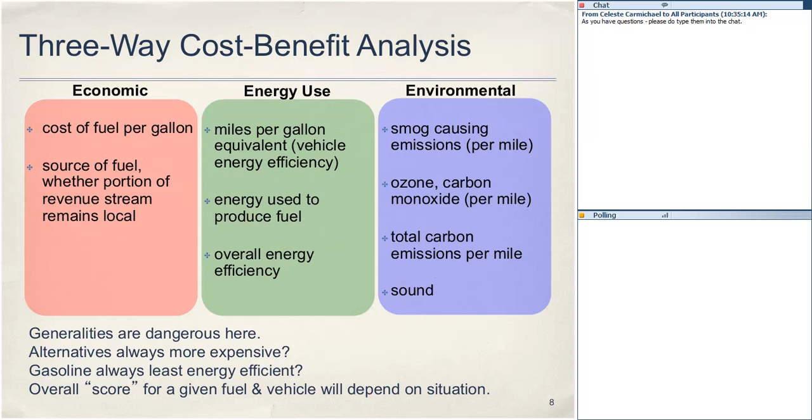I'll go through the next couple, Guillermo, and then you can add anything you want. Paul Mutolo talks about this well-to-wheels analysis. If you are working with anyone in your communities who, from a municipality level, wants to explore transportation issues, I would contact Paul Mutolo. It might even be that you set up a conference call so that an educator and your local municipal leader are on the phone with Paul to walk through how you do a well-to-wheels analysis.

One of the things he is working on in Tompkins County specifically is to bring a hydrogen-powered bus to be part of the Tompkins County Area Transit's fleet of buses. This will be an innovation that I think will require some education. When people hear the word hydrogen-powered fuel, there might be some misconceptions that raise questions in people's minds that we need to provide further education around.

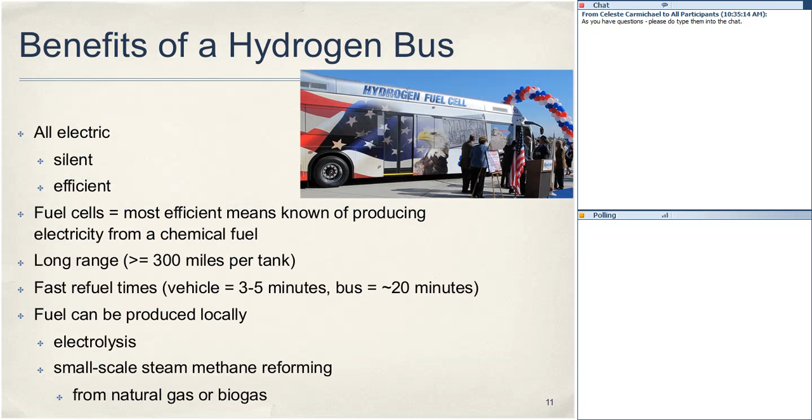So it's an exciting opportunity, and certainly it has benefits you can see listed here. I won't read through them, but it's also providing an opportunity for infrastructure for other vehicles that may come down the pike that will be hydrogen operated. So this innovation is leading to perhaps a broader adoption of this technology by other members of the community. Certainly Paul can talk about the technologies behind the hydrogen conversion.

I think this is the last slide before we go on to the next. So I'm going to see if Guillermo wants to—actually there's one more slide, but Guillermo, before we go on, is there anything you want to highlight about Paul's material?

Sure, thank you. Can you hear me okay? Hello? Hello? Hopefully you can hear me.

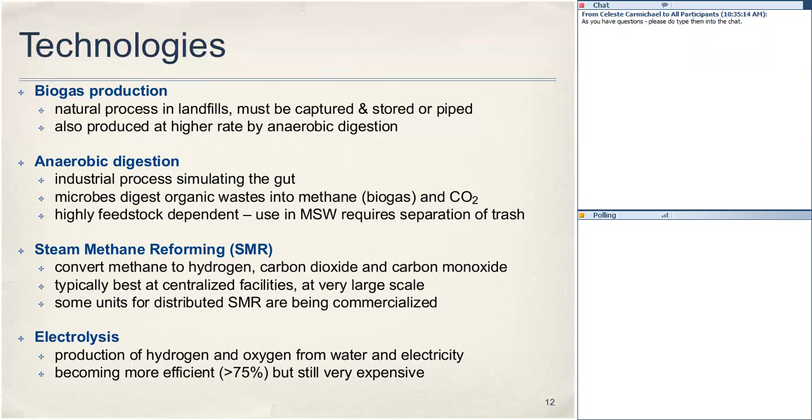What Paul really wanted to point out, as well as what the trucks, buses, and cars are running on, is where that fuel is coming from. I think that was one of the main points he wanted to get across, that these fuels can be produced locally. The hydrogen, the methane, natural gas can be produced from waste. So that was a major point to look at when considering the full system. Traditionally, a lot of what people have looked at is what we're going to run our fleet on, but not where that fuel is going to come from. There's a huge opportunity to use local resources like garbage, as was pointed out, for actual fuel production that these buses and cars can run on.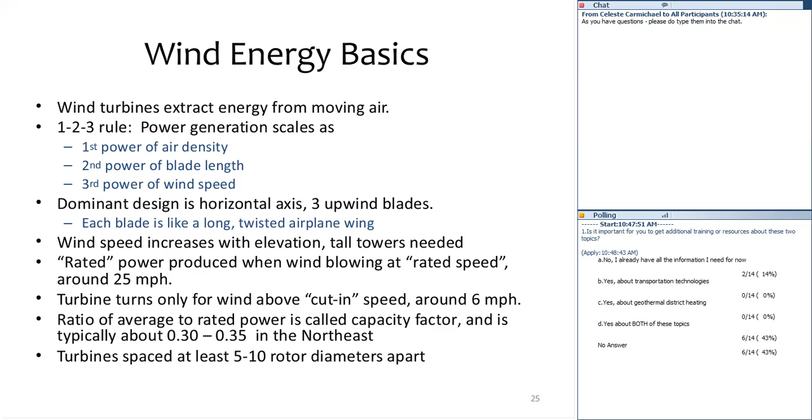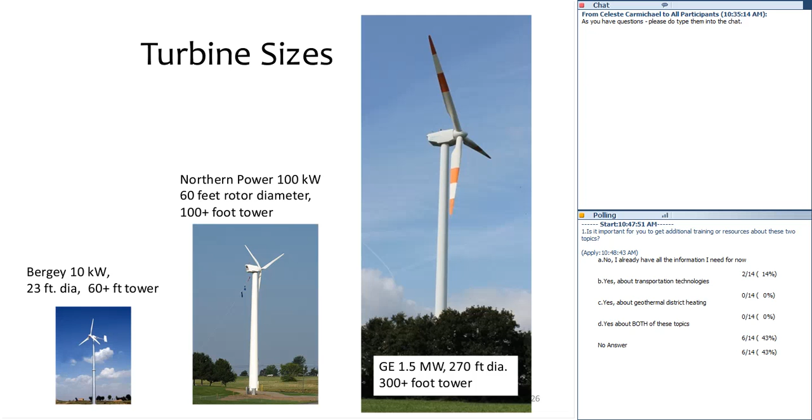On the next page I put a comparison of that GE scale turbine to a 747. These turbines are big, and they don't look so big because you often see them from afar. But up close, you see the real size scale. When you space them 10 diameters apart, you're talking about roughly 1,000-meter spacing between turbines.

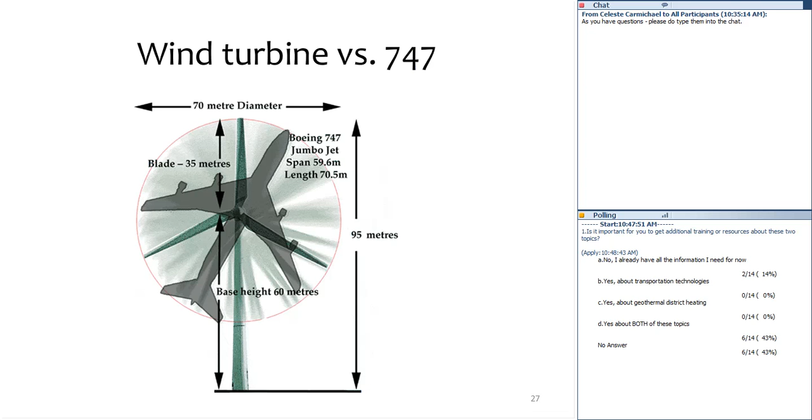Costs in the Northeast are a bit higher, though, because the capacity factor is lower and other expenses are higher. Nonetheless, there's a lot of activity in large-scale wind energy, even by people also generating electricity from coal, natural gas, and other means, because they want hedges against the variability of electricity from gas and other sources.

So in the state, I'll talk a little about that. The Renewable Portfolio Standard requires 30% of electricity to come from renewable energy resources next year. That includes wind, hydro, solar, and so forth. We already have quite a bit of hydropower in the state already.

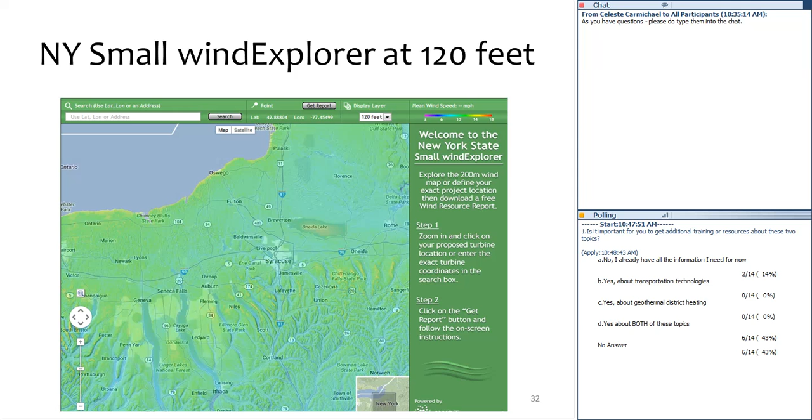A resource that I've found really useful when we've talked about wind energy is the New York State Small Wind Explorer. If anyone's coming to you asking whether it makes sense to have wind energy in your area, you can look at this Wind Explorer and zoom in on an area, and it'll give you average wind speeds. Average wind speed doesn't tell you everything, but if it isn't up over, say, 10 miles an hour or so, you're not really going to have a very good shot at economically producing wind energy. So that's a good resource.

And then, in the end here, I've listed a bunch of other resources: wind project listings, wind resource maps at the small scale and lower altitude, and higher scale for higher altitude industrial turbines. There's also all kinds of issues around review, siting, permitting, studies you've got to do, and financing. The NYSERDA Wind Energy Toolkit I found was very good—it steps you through how to do it and what's involved if you've got to deal with wind energy development.

Just so folks know, we did post this information sheet to the CARDI website. So if you go to the CARDI website and go to our community and energy section, you'll find this information flyer and all 4 presentations that were done at the Association of Towns conference.

Alan, I know you may not stay with us for the entire time, so let me just ask a question, because I know that in some places in the state, wind energy has been as controversial as natural gas hydrofracking. And in the public discourse there's a lot of what seems to be misconceptions about wind energy. Do you want to address what you've heard—worries about bats, flicker, and other concerns—what's out there in the general public's thinking about wind energy?

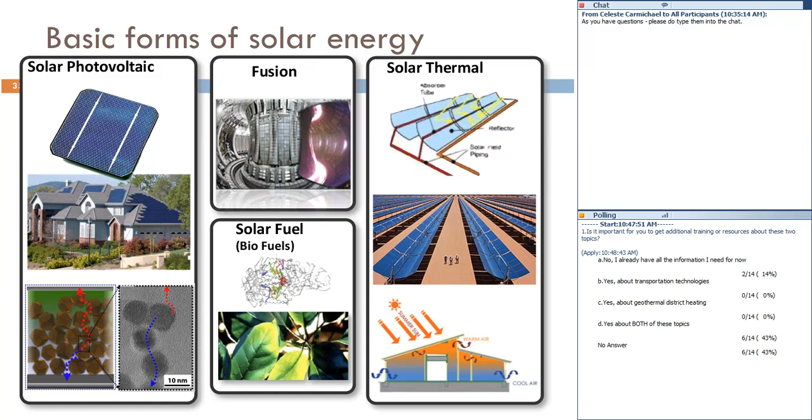And then solar thermal, which is the heating of water. You can also make electricity by heating that water to a level where you can turn a turbine with it. And you can also just heat domestic water, or domestic hot water, with the sun.

The availability—some folks really don't realize just the amount of solar energy hitting the Earth at any one time, but the amount of sunlight incident on the Earth in one hour is more than enough to supply the global energy demand for one whole year. The issue is that it's inherently intermittent, so there is nighttime everywhere, and it's also relatively dilute, so the amount of usable energy is significantly less than that.

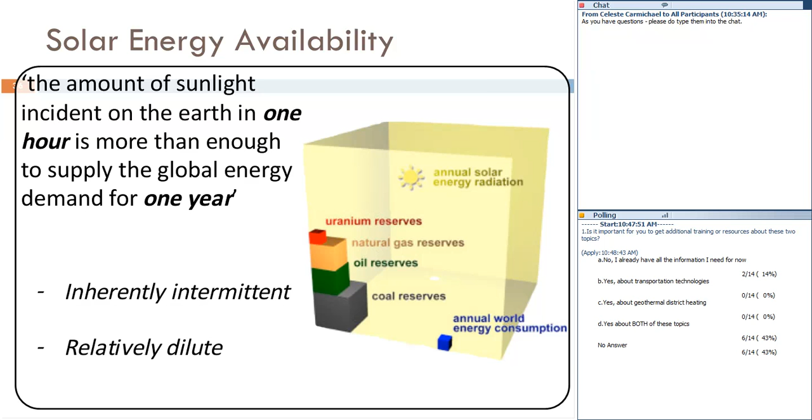I wanted to point you to a resource, PV Watts, developed by the National Renewable Energy Laboratory. If you Google PV Watts, it's a calculator. You can see circles in red showing the size of the system, the DC ratings you plug in, your expected system size, and the array type, whether fixed tilt or tracking. The program gives you other necessary components, like what angle to tilt your panels, and readings on your actual solar potential in your area. The conversion factor, the derate factor for Syracuse in this case, is 0.77, so 77% of the sun's energy is usable there.

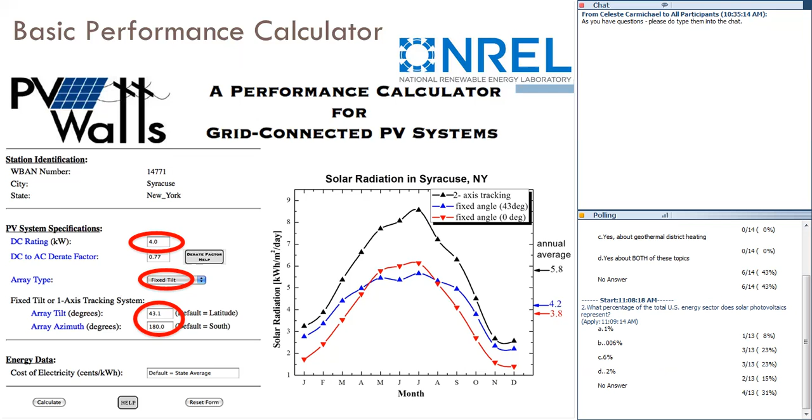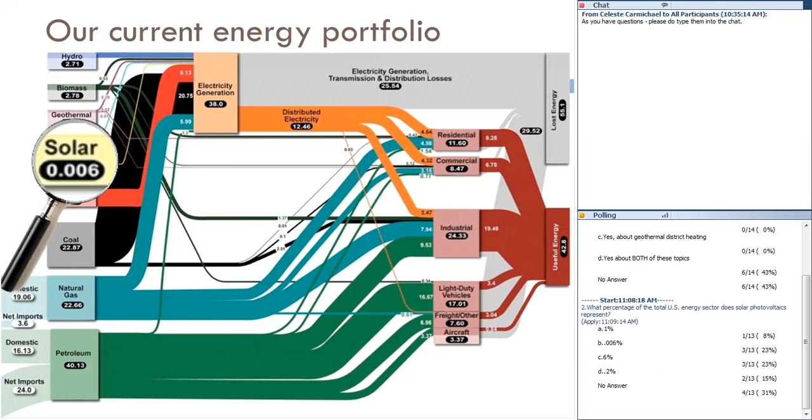Now we can see the actual amount of solar as a factor of the total U.S. energy sector is actually 0.006%. Quite a few people got that correct, 23% of you. That's good, but it's somewhat sad that such a tiny amount of our total energy is coming from PV at this point.

Basic motivations for adoption of renewable energy: we've traditionally been hammered with the fear of peak oil, CO2 emissions, and climate change. I think these are good driving factors sometimes for getting us to do the right thing, and certainly they are valid. We can get into more details of what peak oil and CO2 emissions are doing or what they mean, but certainly renewables are a way to alleviate our reliance on fossil fuels, which are the major contributors to climate change.

The other way to look at it is as an opportunity. There are a lot of opportunities in renewables, specifically in solar. Commercial deployment of solar PV since 2000 has seen quite an increase, an average of 65% annual compound growth over the past 5 years in the adoption and deployment of solar in the U.S. If you look at installation, we are increasing quite rapidly.

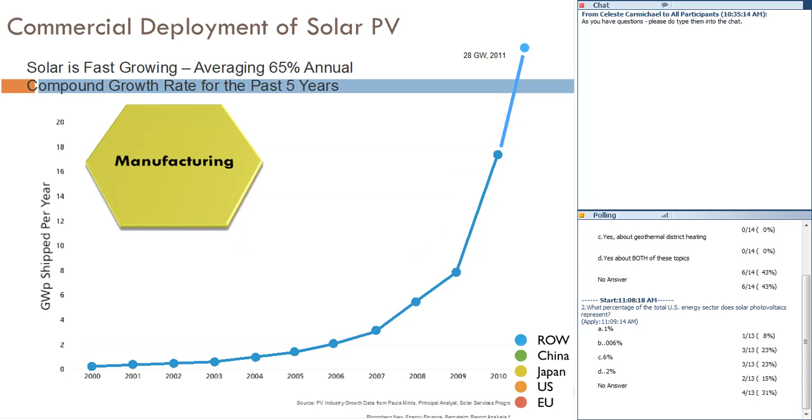The installed percentage: pink is the European Union, and the U.S. is about 10%, with China in green at 12%, Japan at 13%. Out of the total deployment, most of it is still in Europe, but the U.S. is catching up. For manufacturing, most is occurring in China at this point, but just 5 years ago it was a much smaller percent, with Japan leading. The U.S. has a small sliver there, but some companies are moving back to the U.S. in terms of manufacturing.

Let's do the other poll now. With most PV, most of the innovation occurs where? Most of it is made where? And proportionally, most of it's installed where?

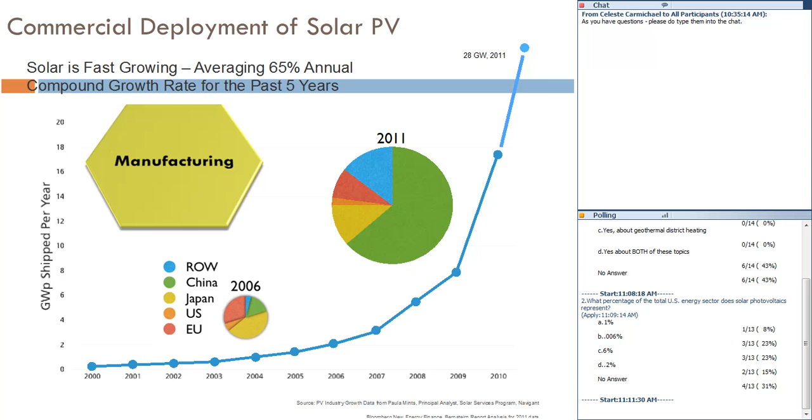This slide gives you the answer for where most of this is being made. The vast majority has been invented or innovated here in the United States, so most of the patents are coming out of the U.S. still, but it's being manufactured in China and deployed in Europe. Germany specifically has the highest deployment in the world. Many of you got that correct - the U.S. is still leading in innovation.

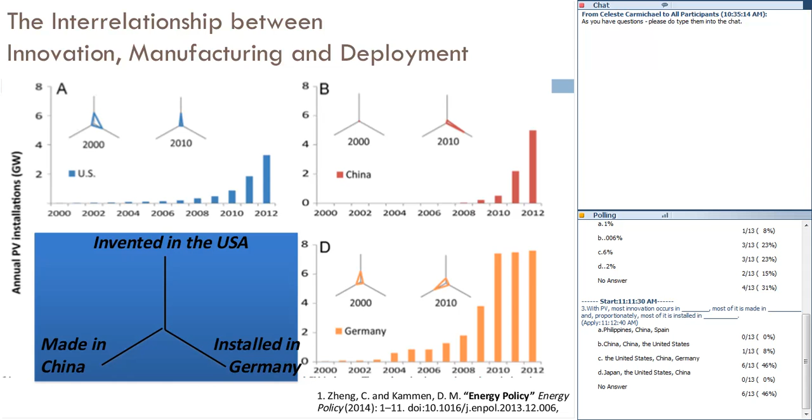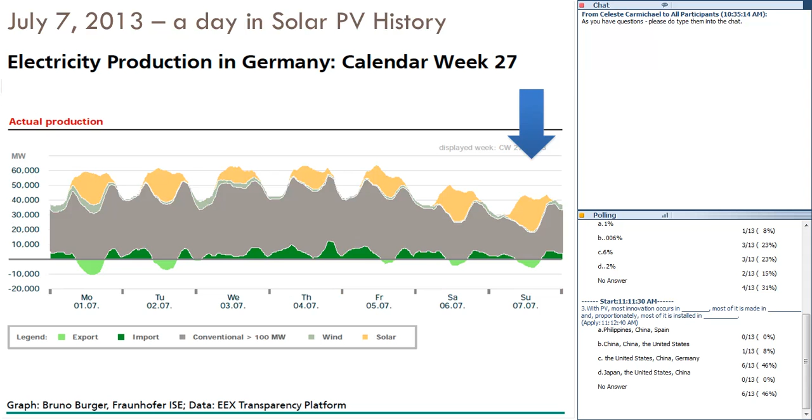Now, electricity production in Germany - this is a really interesting day in history, July 7th of last year, where the total amount of electricity being made from solar was higher than the amount made from anything else in Germany on that day. So solar was actually cost competitive, market competitive in every way, and utilized at a greater level than any other source of energy for a day in Germany.

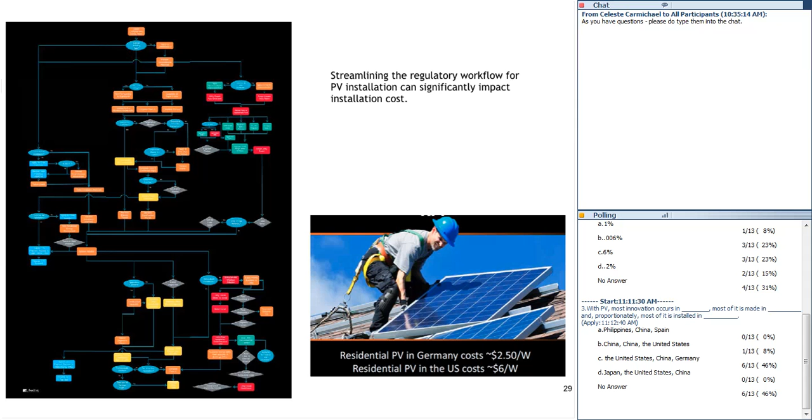Some of the costs we look at - this chart is very busy, but on the left side is a workflow diagram for PV installation. While the costs are coming down for the manufacture of cells, the balance of systems, or BOS costs, are something else that needs to be addressed. Some of that workflow is where we can bring those other prices down. But the major cost reductions over the last decade or so have really been in manufacturing of the cells themselves.

In New York State, looking briefly at what a solar cell is, it can be compared to a battery. You have a cell, many cells make up a module, and several modules make up an array. The 10 by 10 centimeter cell provides about 1.2 watts typically, and a cell voltage of about half to 0.6 volts. Then you connect these in series to create a module, and those into strings.

So as you can put batteries together, you can create more power from the system. A few case studies: residentially, typically 1 to 10 kilowatt systems up to about 20 kilowatt. Commercial, typically on rooftop, would be 10 kilowatt up to about 1 megawatt. And utility scale, putting that power back into the grid at 1 megawatt up to 500 megawatt scale.

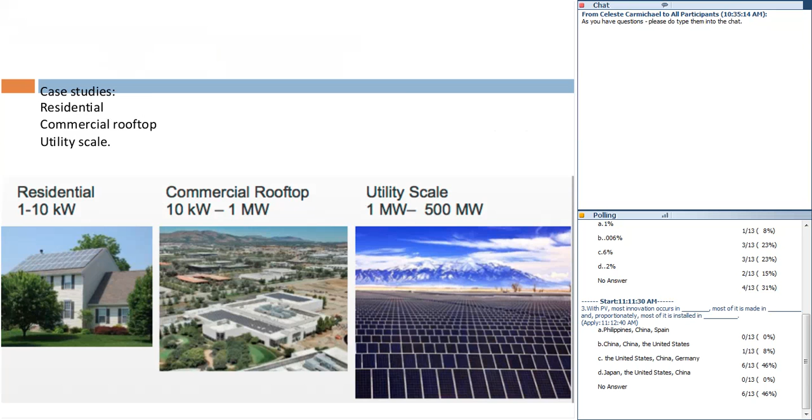And another that's under development, a 10-acre site right by the airport. You can see that landing strip there in the lower quadrant is Tompkins County Airport. They're looking at putting into that orange outlined area about 6,700 modules that would provide about 2.5 million kilowatt hours annual production, which is about 1% of the Cornell University campus use. But it would also provide $190,000 annual value savings.

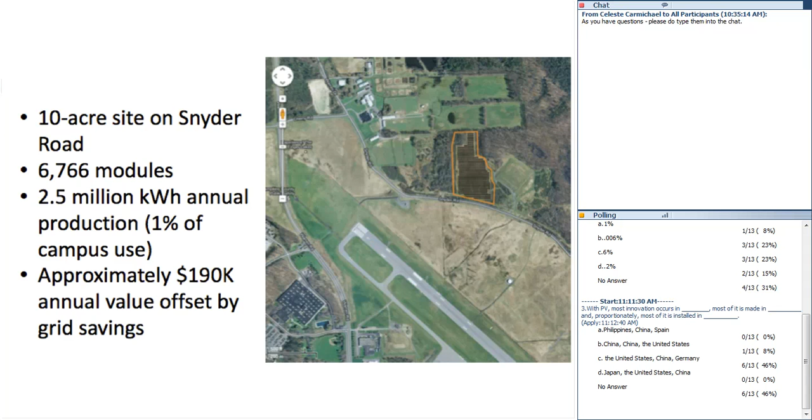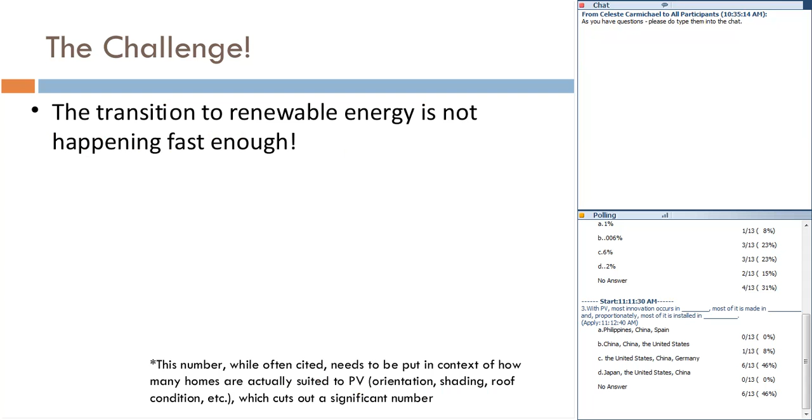Briefly, I want to run through some slides for the Solarize Tompkins program. Solarize is gaining a lot of traction statewide and even nationally as a program to boost solar adoption. Here in Tompkins County, we tried this in 2013, and the challenge was that the transition to renewable energy wasn't happening fast enough. Even though Tompkins County is a leader in solar adoption in New York State, there was still less than 1% of homes with solar power systems. That should be looked at with the caveat that out of that total number of homes, really only a small percentage is actually suited to PV installations, so it cuts that number significantly. But still, the total amount of solar has not been realized as far as potential.

So if we look at the poll again, what are the three main barriers to the broader adoption of solar according to this Solarize program, which I'll get into a little bit what that is. The Solarize program is a national model, so if you have a chance, fill that out.

Guillermo, we lose you just slightly once in a while when you turn your head, just so you know. Sorry, thank you.